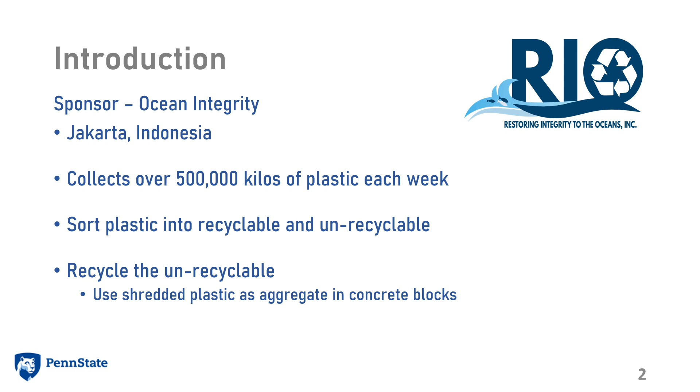The main goal of this project was to determine the maximum amount of shredded waste plastic that could be incorporated into concrete while still meeting the ASTM strength requirements. This was done by first collecting and shredding the waste plastic. Then, concrete cylinders were molded and tested. The data from this testing was used to determine the highest acceptable plastic percentage in the concrete.

The secondary goal of this project was to evaluate possible solutions to improve the interfacial adhesion between the plastic and the Portland cement. This was done by modifying the shredded plastic using accelerated weathering and surfactant soaking. Concrete cylinders were then created and tested. Finally, the effects of the plastic modifications were evaluated.

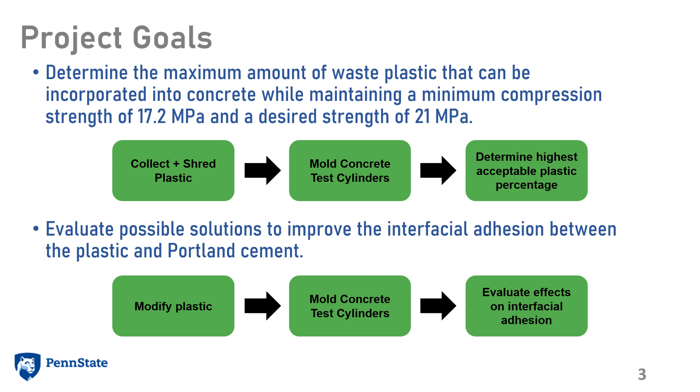To mold the concrete test cylinders, PVC pipes were bought and cut to the required 20.3 centimeter length. Then the mix design table shown in green was created by using a 1 to 1.5 to 1.5 cement to gravel to sand and plastic waste ratio. This table helped to determine how much of each material needed to be measured and mixed together for each batch of cylinders.

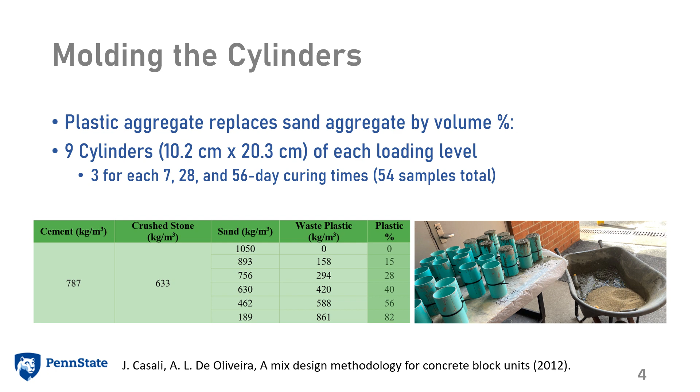For the initial testing, cylinders were molded using 0, 15, 28, 40, 56, and 82% loading levels of plastic waste. 9 cylinders were molded for each loading level so that there were 3 cylinders for each loading level to test on 7, 28, and 56 days of curing. After the initial testing was complete, the same concept was used to mold the cylinders for the secondary testing.

It was hypothesized that with a 20% volume plastic aggregate replacing sand aggregate and 0.45 water to cement ratio, the concrete cylinders would achieve the ASTM recommended strength of 21 megapascals after 28 days of curing.

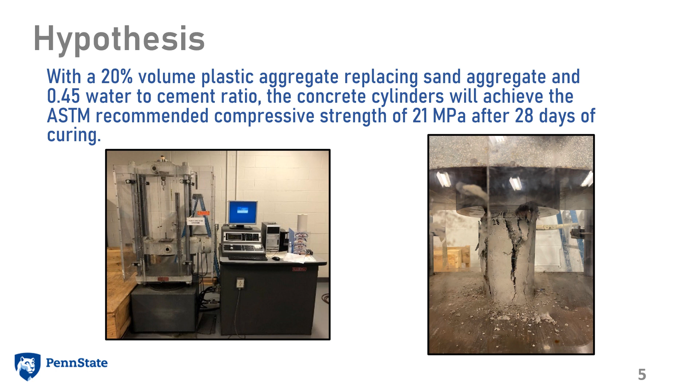This graph shows the compressive strength test data as a function of cure time for the various percentages of plastic incorporated into the concrete. Also on this graph, you can see a 17.2 megapascal minimum requirement and a 21 megapascal recommended requirement. After a full 56-day cure time, up to 28% loading level of plastic achieved the 21 megapascal requirement.

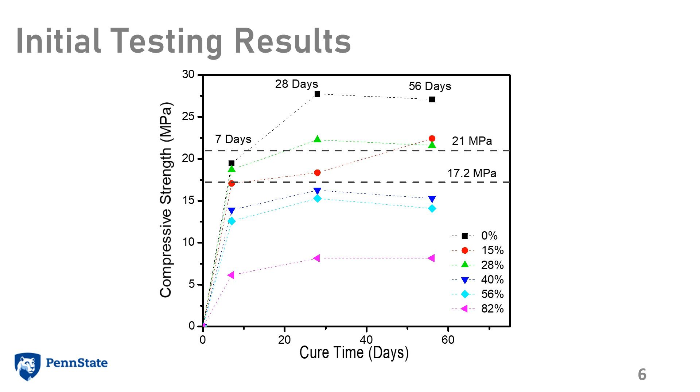Once the initial testing confirmed that a 28% loading level achieved the recommended strength value, several secondary tests were run. The first involved lake plastic to see if environmental exposure had any effect on the compressive strength. As seen in this graph, there was not a major change from the previously used post-consumer plastic.

Plastic was also exposed to UV light in a QUV machine in an attempt to radicalize and oxidize the plastic in order to have some interaction with the polar cement. This also did not have a major effect, likely due to limited exposure time.

Surfactant was also introduced to act as a compatibilizer between the plastic and cement. This dropped the properties, possibly because of micelle formation hindering the cement cure, or the fact that the surfactant was sodium-based. Lastly, recycled polypropylene pellets were used to evaluate geometry effects, and this decreased the properties since the spherical pellet could not as effectively deflect a propagating crack tip.

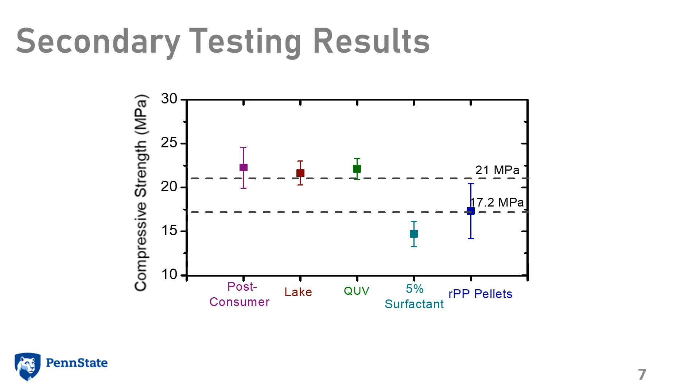In addition to the initial and secondary testing, flame testing was completed to assess how damage done by fire could affect the compression strength of the concrete. Each cylinder was rotated while a flame was held to the surface for 5 minutes.

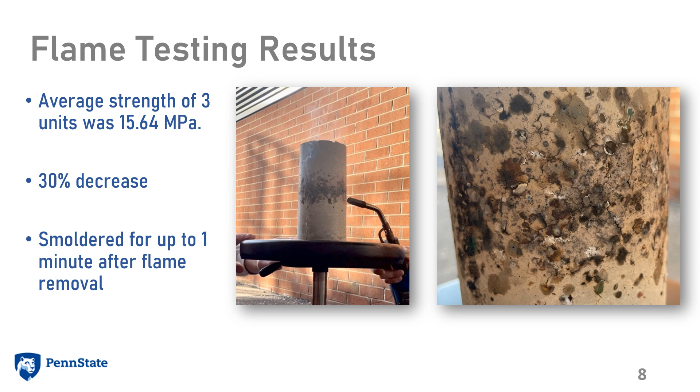Cylinders with a 28% loading level of plastic were used, and it was determined that the average strength from the initial 28% cylinders dropped to 15.64 megapascals. This equates to a 30% decrease in compressive strength. It was also noted that the cylinders continued to smolder for up to 1 minute after the flame was removed.

In conclusion, it was determined from initial testing that 28% plastic aggregate replacing the sand by volume percent is the highest recommended amount of plastic to incorporate into concrete and still maintain compressive strength values required in the ASTM standard. The environmental effects of lake and QUV plastic did not improve the interfacial adhesion and compressive strength of the concrete.

Surfactant soaked plastic was below the minimum strength due to it likely hindering the cement curing. The recycled polypropylene pellets were also below the minimum because the spherical shape does not deflect a crack tip effectively. It was also determined that exposure to the flame for 5 minutes decreased the average compressive strength by 30%.